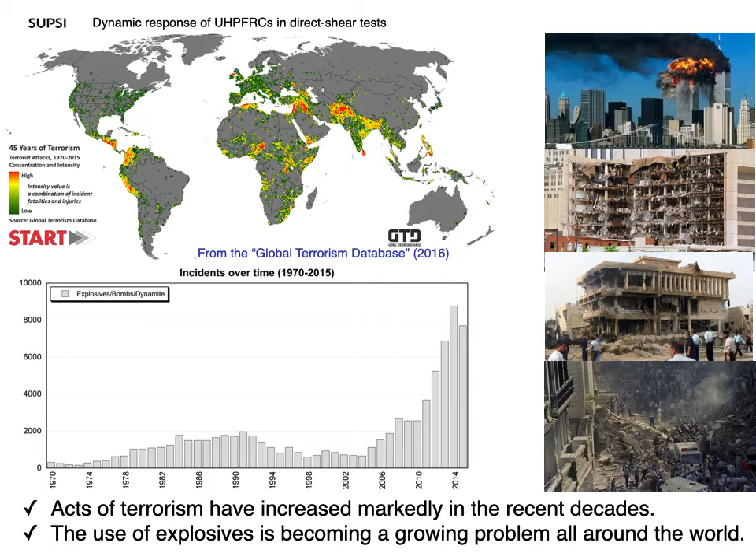Protective structures and critical infrastructure need to withstand exceptional loads such as blast and impact. Many of these structures are made of cementitious materials, and among the very promising materials for the production of shields and protection are ultra-high performance concretes, usually defined by their commercial name.

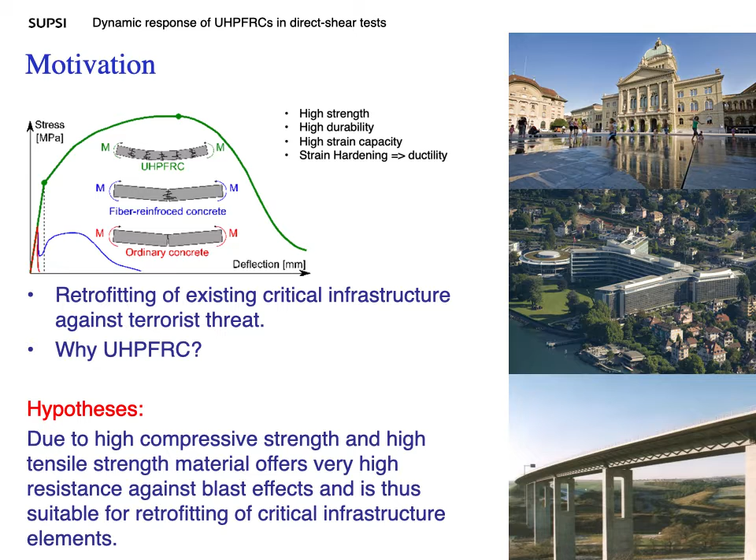Ultra-high performance fiber-reinforced concrete, in comparison to normal strength concrete, does not follow the same framework where these tests were developed.

This work is part of a long-term research on the protection of infrastructure from the effects of IEDs and blast charges. This research is funded by the Federal Department of Defense, Civil Protection and Sport of the Swiss Confederation.

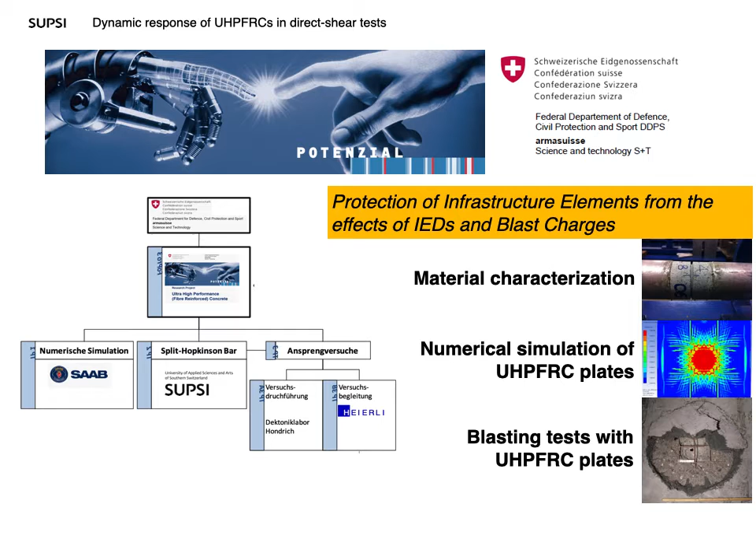The research is subdivided into three tasks: material characterization, numerical simulation, and it has been developed using two special research infrastructures. The first one is the Hondrich Detonics laboratory.

It is a modern underground test facility designed for fully instrumented Detonics experiments. This laboratory was created by reusing a former artillery fortress from the Second World War. In this lab, different slabs were tested with C4 contact and standoff charges.

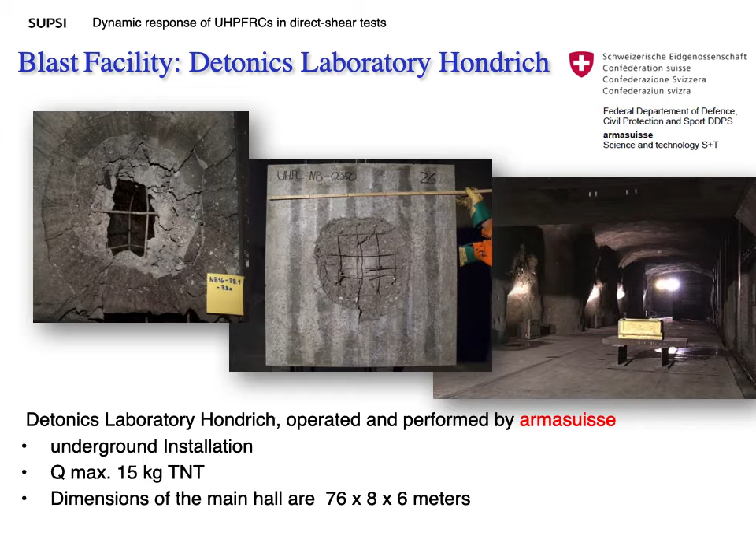The second one is the DynaMat laboratory. This is an advanced laboratory for mechanical characterization of materials in dynamics, able to accurately measure the stress-strain curve of materials in tension, compression, and shear across a large range of strain rates.

This laboratory was founded by me in 2006. Since 2015, it has been included in the roadmap of research infrastructures of national relevance of the Swiss Confederation, and will remain on it until 2028.

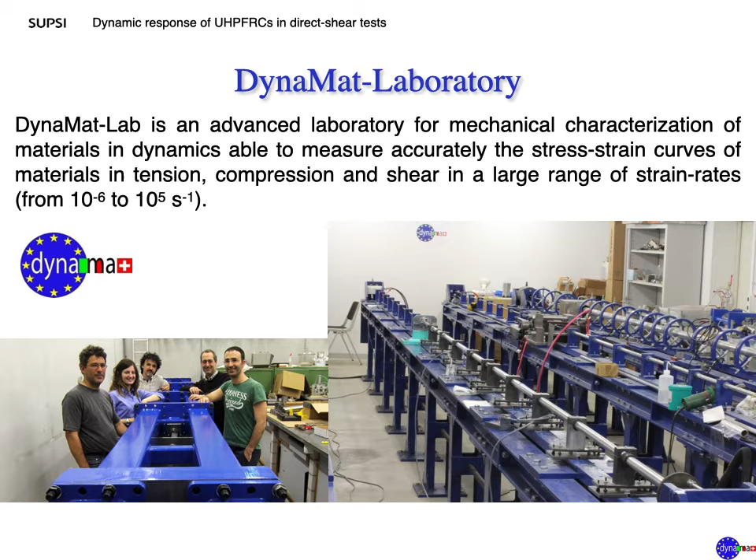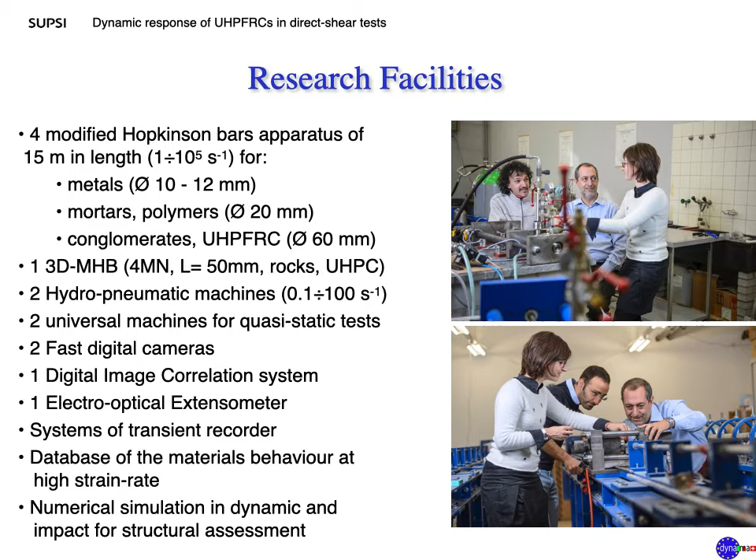This laboratory is equipped with several modified Hopkinson bars for testing metals, polymers, concrete, and rocks at high strain rate. We also have two hydropneumatic machines for medium strain rate and two universal machines for quasi-static testing.

With this philosophy, starting from material testing, we calibrate existing constitutive laws or create new ones. The third step is design calibration in the finite element code, and finally the structural assessment is performed with the partner.

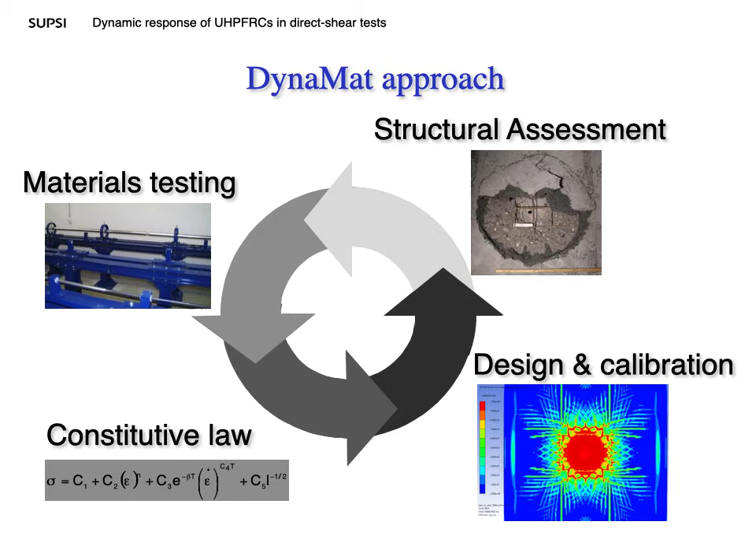The aim of the research was to study a retrofit system using ultra-high performance concrete. When a critical structure has been designed without any blast protection, it is necessary to improve its resistance capacity by means of retrofitting.

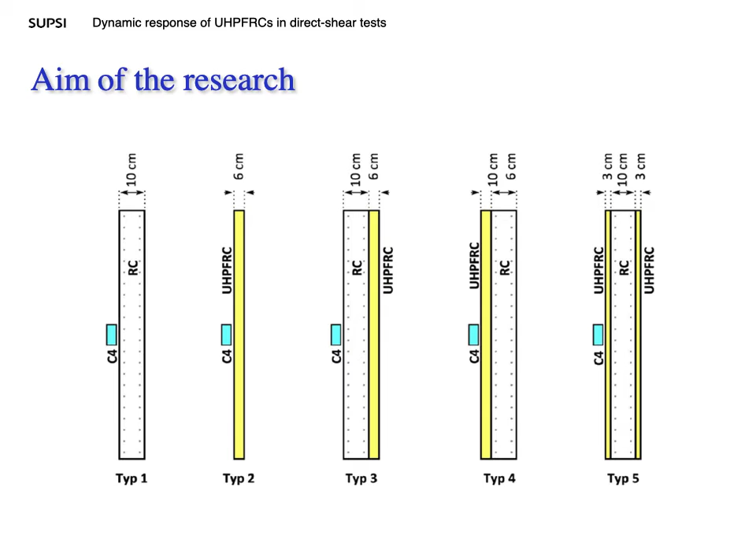We have characterized the material in different failure modes, such as tension, compression, indirect tensile, and shear behavior. In particular, now we are concentrating on shear behavior.

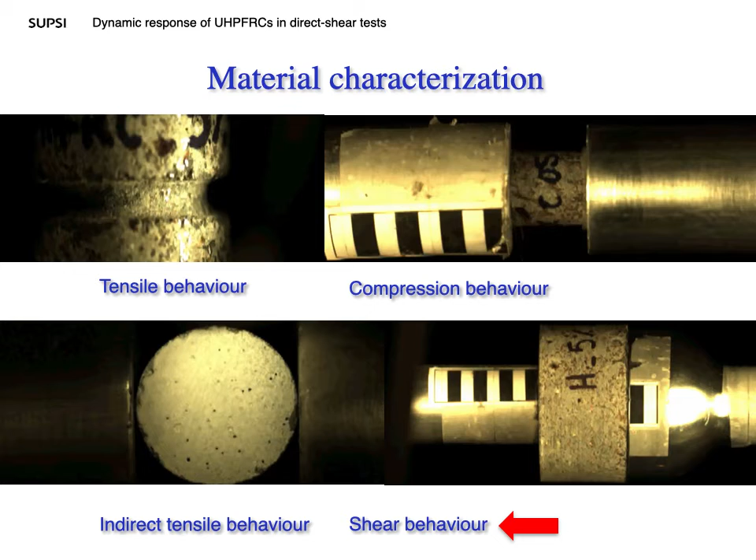Four materials are analyzed here, and they were a commercial product characterized by very high strength. High-carbon, crimped fibers, 13 mm long and 0.2 mm in diameter, were used.

The addition of increasing percentages by volume of steel fiber allows achieving outstanding mechanical properties, such as very high compressive strength and flexural strength. Compressive strength ranges from 178 up to 200 megapascal, and flexural strength from 24 up to 42 megapascal.

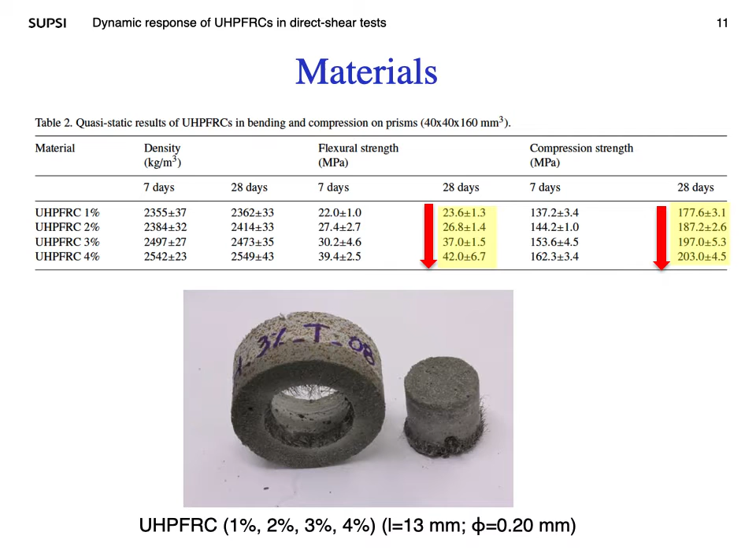The direct shear specimen has been designed following a numerical optimization study. A short gauge length permitted achieving a homogeneous stress distribution in the gauge, also in the case of testing at high strain rate.

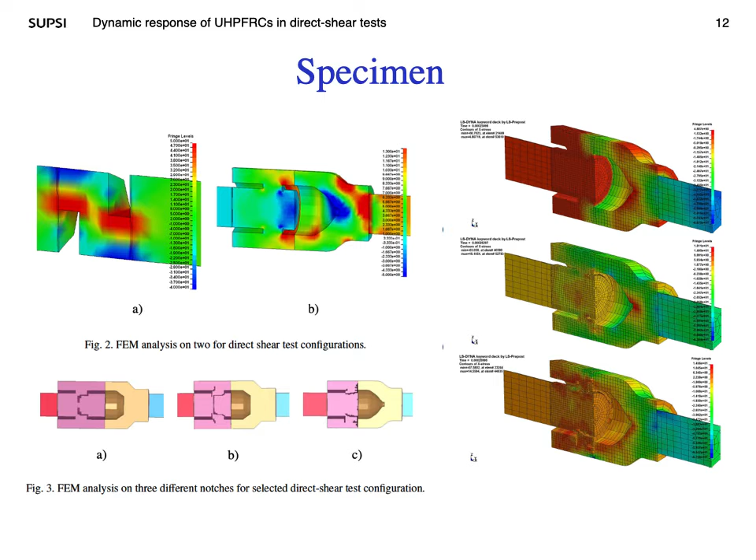High strain rate direct shear testing has been carried out by means of a modified Hopkinson bar in compression. The system consists of two circular aluminum bars having a diameter of 30 mm and a length of 3 meters, for both input and output bar. The specimen is sandwiched between the input and output bars through a special connector designed to maintain constant acoustic impedance, in order to avoid spurious reflection at the interface.

Input and output bars are instrumented with semiconductor strain gauges, which measure the incident, reflected and transmitted pulses acting on the specimen. The pretensioned bar is made of high-strength steel, 6 meters in length, connected to the input bar, and permits storing elastic energy that is abruptly released thanks to the failure of a brittle bolt, causing compression wave propagation in the system. So incident, reflected and transmitted pulses are obtained.

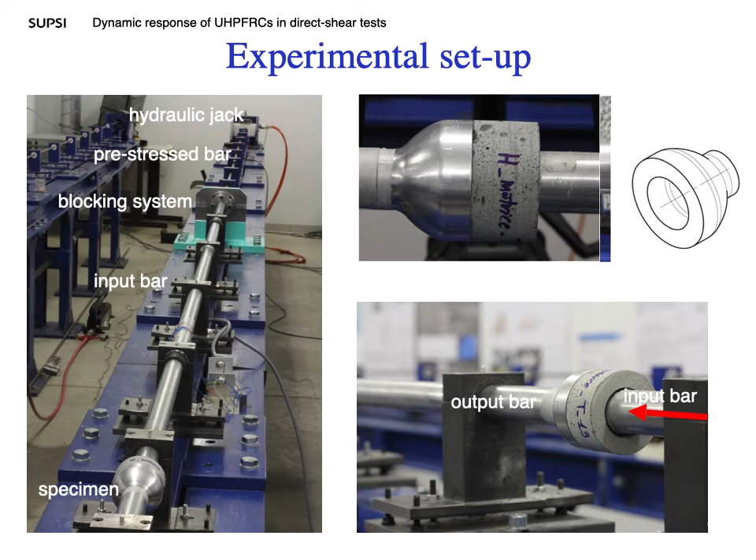On the basis of this, and considering the equations regarding one-dimensional wave propagation, it is possible to evaluate the shear stress, shear slip, and strain rate history.

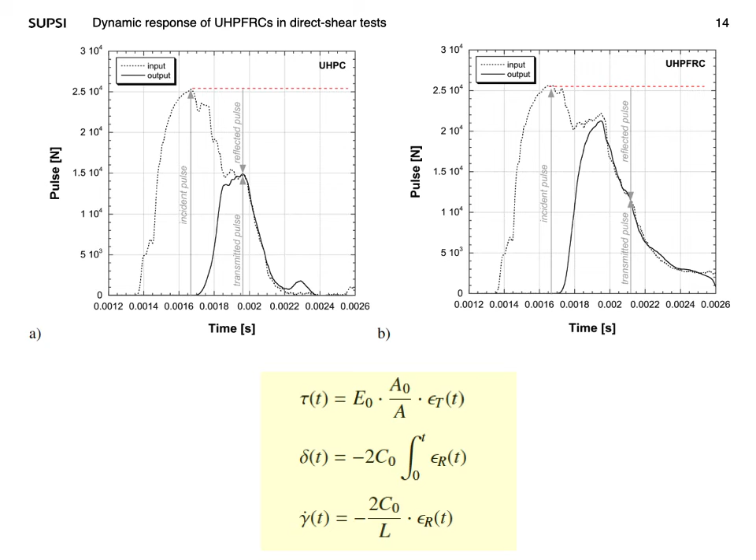The deformation capacity is incremented, allowing higher distortion of the material. This effect could permit structures made with these materials to achieve higher deformation, and as a result, higher ductility.

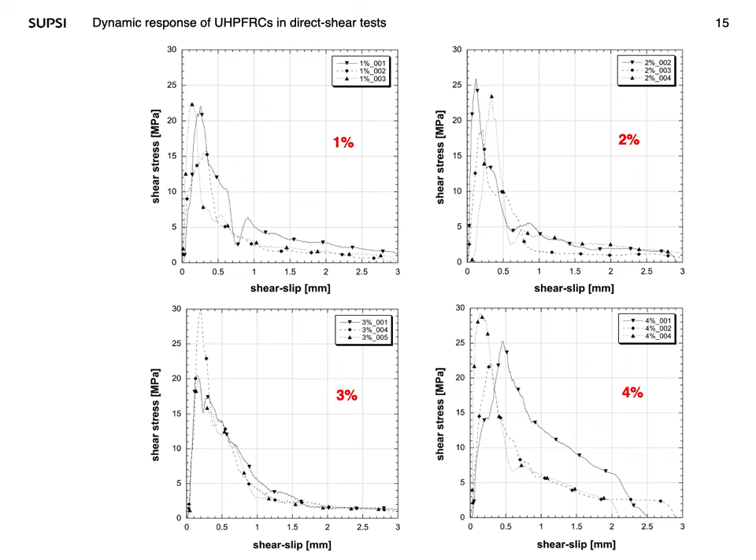The fiber orientation and distribution have a strong influence on the tensile and also on the direct shear behavior. Increasing the fiber content also increases peak stress, and post-peak stress is obtained. When the orientation of the fiber is well distributed along the loading direction, the behavior tends toward pseudo-elastoplastic or strain hardening behavior.

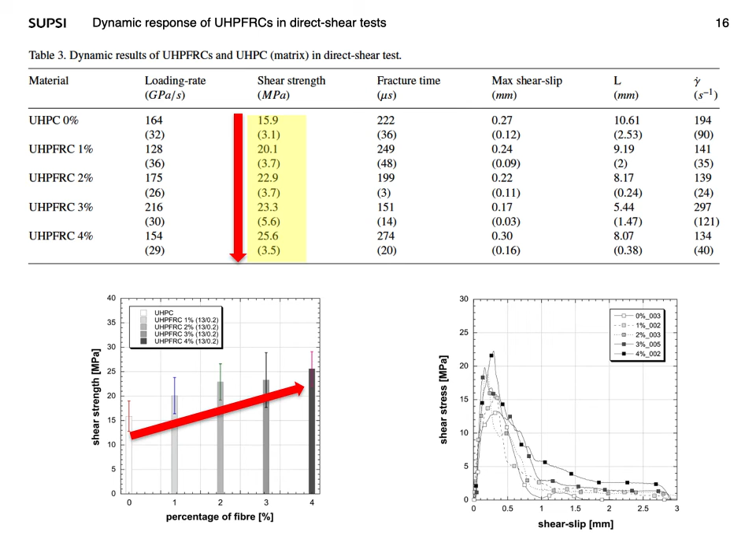The influence of fiber percentage can be highlighted by observing the comparison of average shear strength between the different ultra-high performance fiber-reinforced concretes, with fibers having different aspect ratios. It is confirmed that shear strength increases with increasing percentage of fibers. It can be noted that fibers with the same length, 13 mm for example, but different diameter, produce different results.

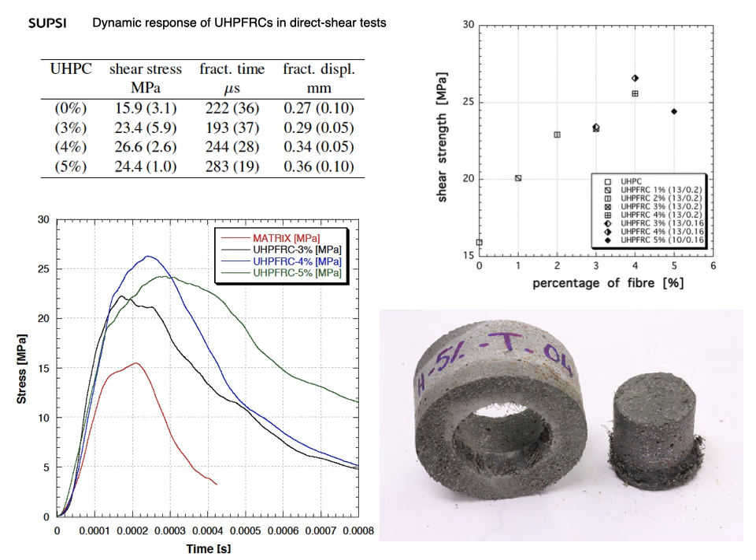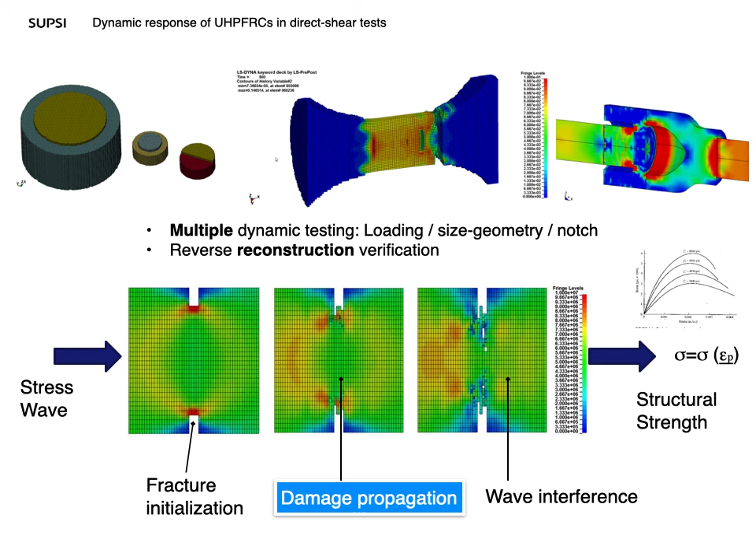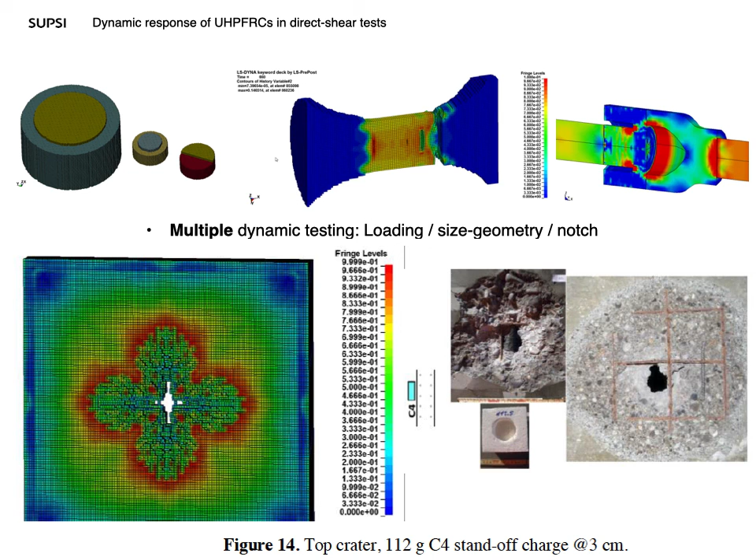In conclusion, I'd like to highlight the complexity of this topic. Thank you for your attention.